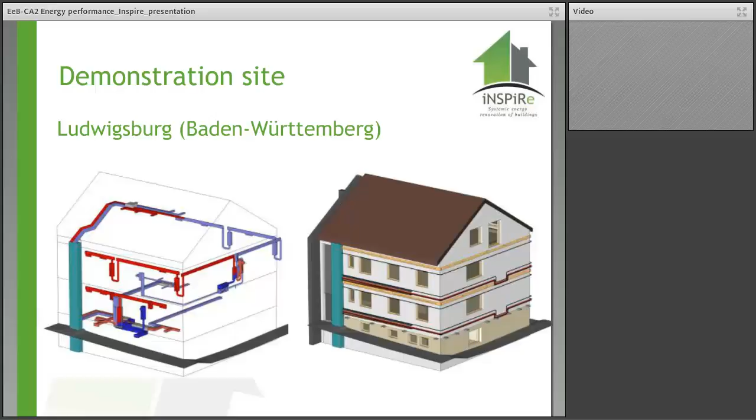As I said before, all these pipelines and ducts are installed outside the existing envelope to minimize the discomfort during installation for the tenants. The pipelines have been installed on the facade. The ducts for ventilation have been installed during the prefabrication process of the insulation elements. Again, insulation is not a normal one. It is a prefabricated wooden frame facade element, which is anchored to the existing facade, as you can see here on the render.

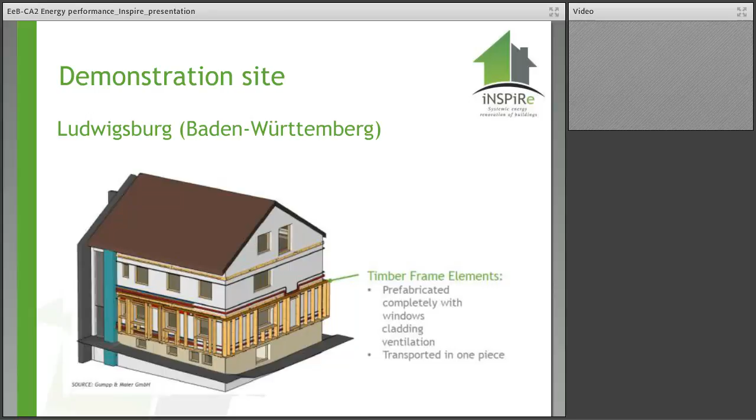So basically, the construction process is that you install the pipelines, and then you wrap everything up with these prefabricated wooden envelope elements during the construction process.

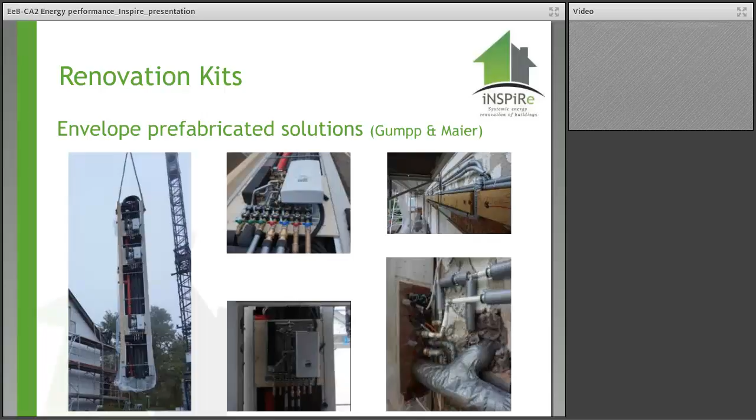And here again, in the same shaft picture and in the two central pictures, you see the hydraulic boxes that have been installed to connect the single dwellings, domestic hot water and space heating, to the central system.

To install all these pipelines, we used the staircase, which is a quite common and useful solution, because this volume is most of the time underused or exploited in all buildings. So there is quite some available space to install active elements, and that is quite useful because if you have elements like this hydronic unit on the right side, and you need to inspect and maintain them during the lifetime of the system, then this staircase position is quite comfortable for the maintenance people.

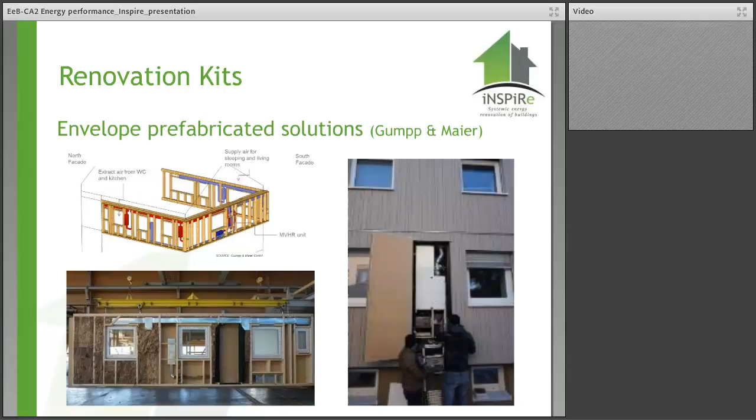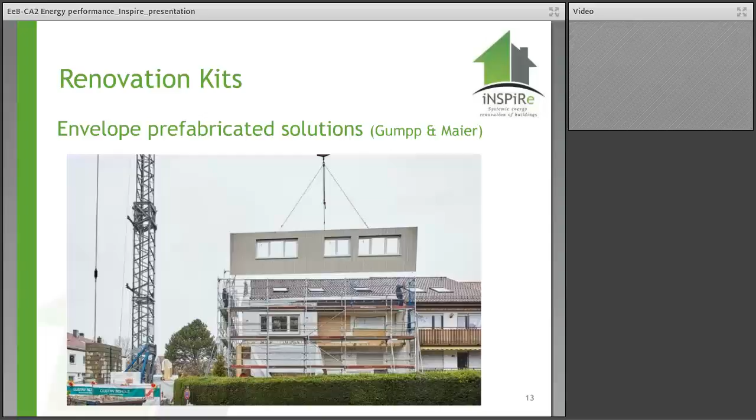Going back to the prefabricated wooden envelope elements, as I already explained, they come in a height equal to the height of the single floor, and they cover the entire length of one facade of the building. Here you see again duct lines, windows, and insulation already pre-installed during the fabrication phase. These elements, as you can see in the picture, are brought on site as a single element and anchored to the existing facade, wrapping up the entire building.

And to do this, we needed to cut as much as possible the thermal bridges, and the balconies were one of the main bridges we encountered, and therefore we decided to completely cut the old balconies, close or wrap up again the building inside the thermal envelope, and then to build this small castle with the new balconies on the west facade.

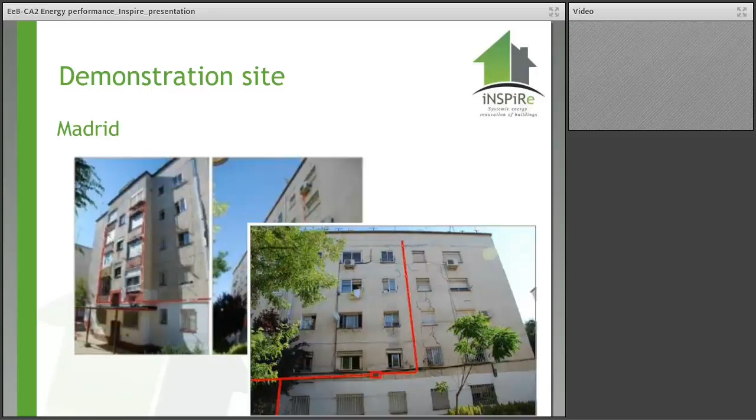Quickly, the second building, that is a multi-family house, a bigger one, 5 floors, 10 apartments, located in Madrid. The building was in quite a bad status before the retrofit, with a lot of structural problems and cracks both outside and inside the dwellings, as you can see in the pictures.

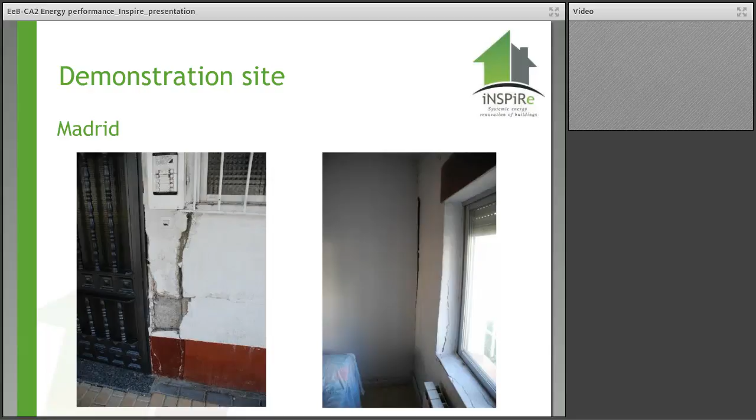So basically what the municipality of Madrid did, first of all, is to work on the reinforcement of the structure. And to do this, they embraced the entire building with a metallic structure connected to a new foundation all around the building. And then they built also this shaft that you see on the left, which has structural reinforcement purposes, and it also hosts the new lift, which is now available.

For you to know, one of the main lessons learned is that due to the fact that the population in Europe is elderly, to add a lift to the building, which was not available before, was one of the main reasons why the owners, in this case 10 single owners, accepted to go for the energy retrofit. So it is not energy, the initial point of view, it is a better, more functional building.

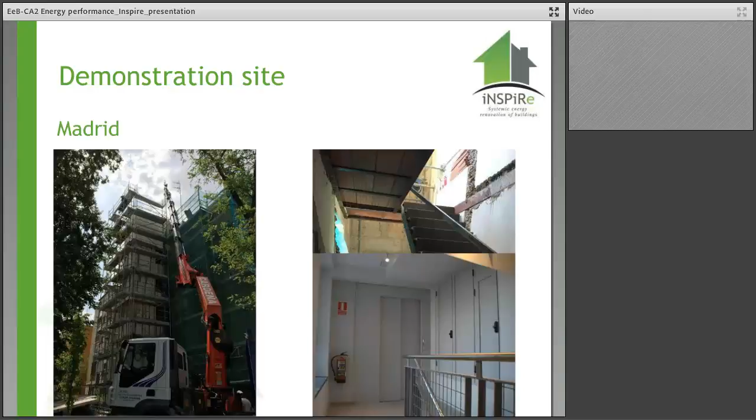So this is how it looks now inside the building, with a new staircase and lift. The retrofit of the envelope of this building was made outside the Inspire project, because that is quite a common solution, with 10 centimeters of rock wool installed on the facade, new windows flush mounted in the insulation, and on top of the existing windows, which are still there.

So there are 2 levels of windows available now, and they also insulated the gap between the ground floor and the ground with some polyurethane insulation foam. So this typical retrofit was not part of Inspire. What we did in Inspire is to retrofit the heating and cooling system.

So basically, starting from one step behind, what they had before retrofit is single gas boilers, electric boilers, and butane boilers. It was really different solutions to produce domestic hot water, and only in some cases space heating. What we wanted to do is to improve much without them spending more in terms of energy bills. Therefore, we worked on the installation of an air-to-water heat pump system, driven also by solar thermal collectors.

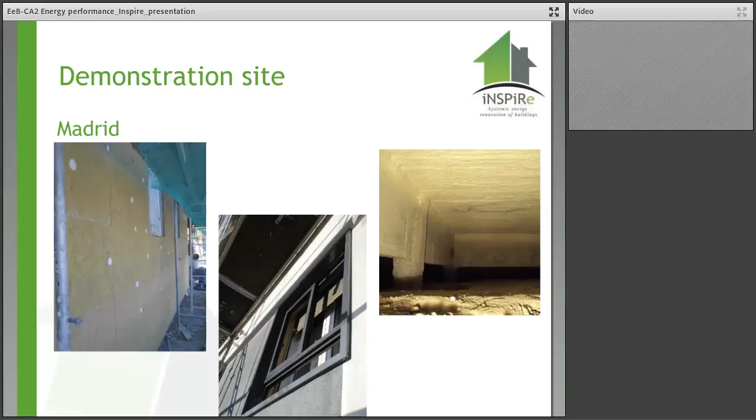And as you can imagine, we didn't have enough space on the ground floor to install this kind of system; the gap between the ground and the first floor is 1.5 meters. What we did is to use again the lift shaft structure that you see here in the right side picture to install the technical room. This is a very well reinforced element that also allows it to bear quite some heavy loads. So we decided to have the technical room on top of the lift shaft.

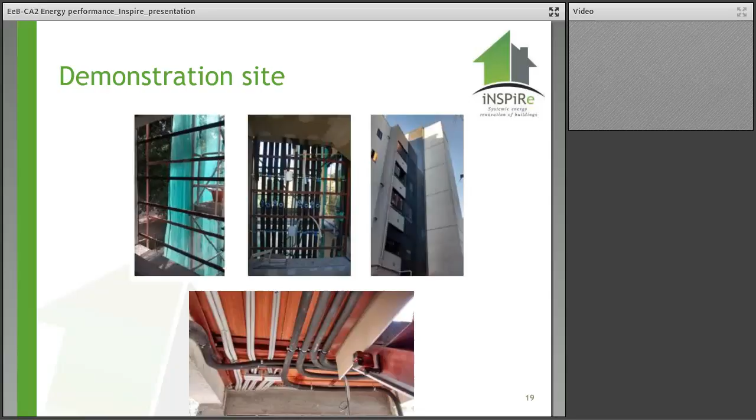Here you see in the central picture how we distributed pipelines for heating, cooling, and domestic hot water into the dwellings. And basically, again, we used the lift shaft to connect the technical room to the single dwellings, and we distributed fluids through the staircase into the single dwellings.

Here on the right side you see the air-to-water heat pump we installed, and the solar thermal collectors, 22 square meters, I don't remember exactly, that are vertically installed on the parapet of the building itself.

Once again, this installation is quite complex for normal installers, and as we worked together with an energy planner for planning the heating and cooling system, I can tell you that it was not really straightforward for them to develop the P&I, the layout of the system, and to size the components. Not to talk about the control of the single actuators like valves and pumps.

So knowing this, what we did through the project is to develop what we call this energy hub, this prefabricated generation solution, which is nothing else than this hydraulic box that you see in the central pictures, which includes basically valves, pumps, and control. What this hydraulic element does, in addition to normal hydraulic boxes that you can find on the market, is to include metering also in the initial construction. So this box is provided together with metering, including the necessary temperature, pressure, and mass flow meters necessary for continuous monitoring and punctual control of the single components.

If we go to Madrid, the retrofit is a little more standard if we forget this heating and cooling system, which is not quite common in these popular neighborhoods. The costing is in the range now of 500 euros per square meter, so not really much high. And when we go on the market with these boxes, we think we can go down to 300, 350 euros per square meter. Again, in this case, I'm not quite sure of the co-funding share. I think it was more in the range of 60-70% public funding and 30% single owners funding.

For you to know, a normal retrofit of these neighborhoods is in the range of 200-250 euros per square meter, only envelope and windows retrofitted. So we added something like 100-150 euros per square meter on top of this, only for the heating and cooling system.